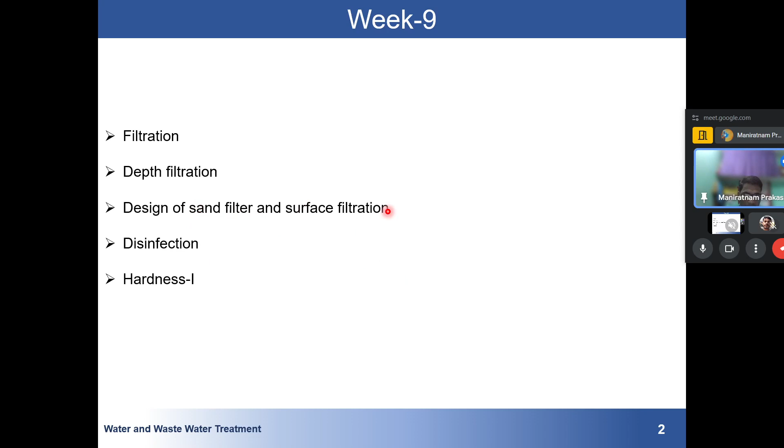Yes, we will be discussing the design of sand filter. As usual, every week we discuss important questions expected in your assignment or quiz, and some concepts at the end of lectures. If you have any doubt during the discussion, you can write in the chat box or raise your hand. If you think I am going too fast or too slow, you can stop me and ask me to repeat things. I will be happy to do that.

So I will be moving forward. The first question is related to depth filtration: which of the following are the mechanisms of depth filtration? There are 4 options given. Before discussing a particular question, I first discuss its fundamentals. So before discussing the term depth filtration, one should know what simple filtration is, and then what depth filtration is.

So with that, first I will discuss filtration. Everyone is aware of filtration. You can think of it as the last step of water treatment, whether it is wastewater treatment or drinking water treatment. Generally in wastewater treatment, filtration is rare and depends on the purpose of treating the wastewater. But if I have to dispose of my wastewater, filtration generally does not happen. For drinking water, if you have collected water from a river or groundwater and treated it, before passing it to the community, you must make sure that water is filtered. So filtration is everything. Everyone knows the definition of filtration: to reduce the turbidity of the water.

Whatever is written there, they are using a conventional method - if a medium is there that contains some kind of sand and similar material, then that water passing through will be termed depth filtration. The particles penetrate deeper in the filter medium where they are trapped throughout the material's depth. Mechanisms of capture include interception, sieving, sedimentation, diffusion, and adsorption within the filter media. Remember, this was influenced by pore size, flow rate, and pressure. But in this case...

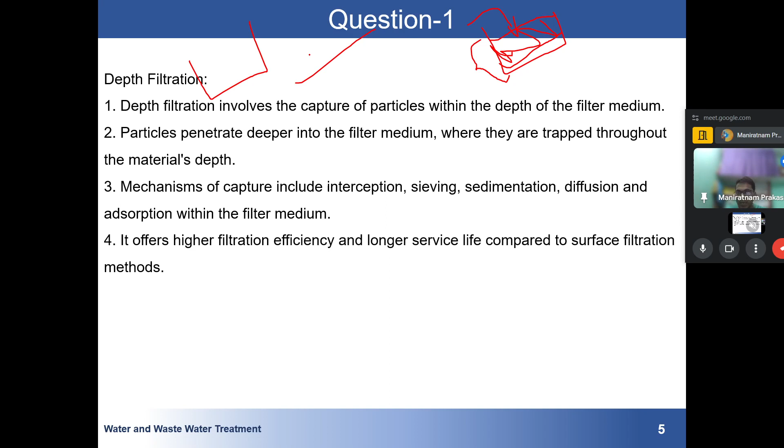What is happening is they are talking about these four mechanisms. It offers higher filtration efficiency and longer service compared to surface filtration. You can imagine, for filtering some x amount of water, if you are using just a membrane versus a filter system, obviously the filter system will be more efficient and long-lasting.

So in summary, both filtration and depth filtration involve the separation of particles from fluid. Depth filtration operates by trapping particles within the depth of the filter medium, whereas filtration typically captures particles on the surface of the medium. I hope this is clear.

So I will be discussing more about the mechanisms of capture involved - I have written only three because these are the main mechanisms: interception, sieving, and adsorption. But apart from that, sedimentation, diffusion, and adsorption are also prevalent methods in filtration.

So in interception, what happens? Particles are captured as they come in contact with the filter media fibers or pores. When particles move through the filter medium, they may collide and become trapped by the fibers and pores. This mechanism is particularly effective for particles larger than the pore size of the medium.

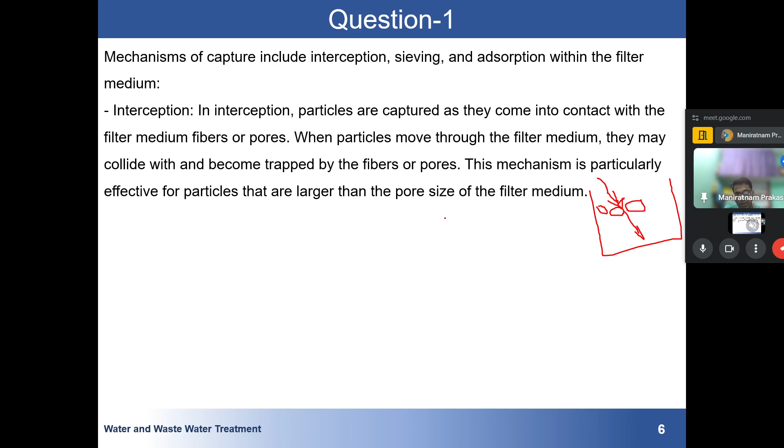So generally, this is your filter media - your grains, whatever the media is, will be arranged in this manner, leaving some kind of pores. Water containing suspended solids will come here, and if the particle size is larger, it will get trapped here, while filtered water gets down here. So when particles move through the filter medium, they may collide and become trapped by the fibers or pores - this only happens when the particle size is larger than the pore size of the filter media. I hope this is clear to you.

Next is something called sieving. Sieving occurs when particles are retained by the small pores within the filter media. As fluid passes through, particles larger than the pore size become trapped within the pores, while smaller particles can pass through more easily. This mechanism is based on the size exclusion principle and is effective for a wide range of particle sizes - again, they are talking about pore size only.

Coming to adsorption - it involves the adhesion of particles to the surface of filtration media due to attractive forces such as electrostatic force. I hope everyone is aware of this term adsorption, so I won't be discussing it in depth. It's a simple interaction between contaminants, generally solids present in the water, and the media, generally solid media only.

Adsorption involves the adhesion of particles to the surface of the filter due to attractive forces such as electrostatic force, van der Waals force, or chemical interaction. Particles may adhere to the surface of the filter media as they pass through it, leading to their removal.

Suppose this is your media and this is your particle size. What will happen is that it will have some adsorption capacity, so water containing suspended solid will come here and the particle present here will get attached to this solid. In this way the water coming from here will be free from any kind of suspended solid. Remember, it's not like only this mechanism is happening.

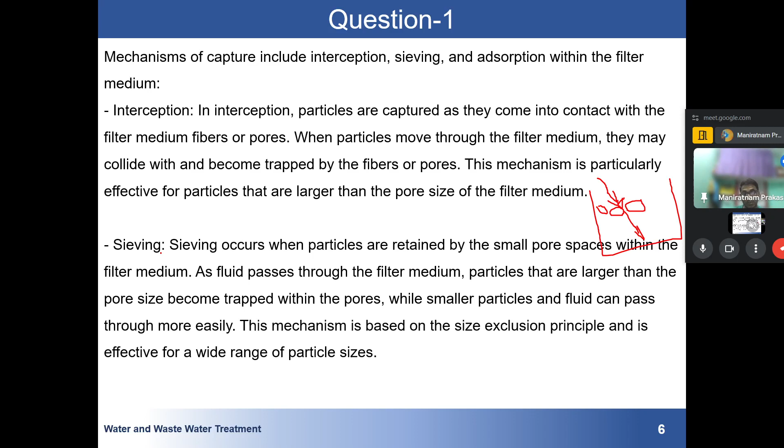All mechanisms are happening together at some place, depending upon what kind of pore size, what kind of media is present in the system, and what kind of suspended solids are present in the system. So the last option is sedimentation.

In some cases, particles may settle out of suspension and accumulate on the surface of the filter media, enhancing the filtration process. This is sedimentation, which all of you already know.

So in this pore size, suppose this is the pore size, let me draw the diagram. This is a pore size, and this is all the soil media. Water will accumulate here, and there are high chances that a smaller particle will get settled down at this place. This is what we call sedimentation.

In some cases particles may settle out of suspension and accumulate on the surface of the filter media, enhancing the filtration process. This sedimentation can help reduce the load on the filter media by removing larger particles before they reach the medium, thus prolonging its lifespan. I hope this is clear to you.

So again, this is another case, that is diffusion. Diffusion means, if you joined our first class, diffusion happens when there is a difference in concentration. Diffusion always happens from high concentration to low concentration.

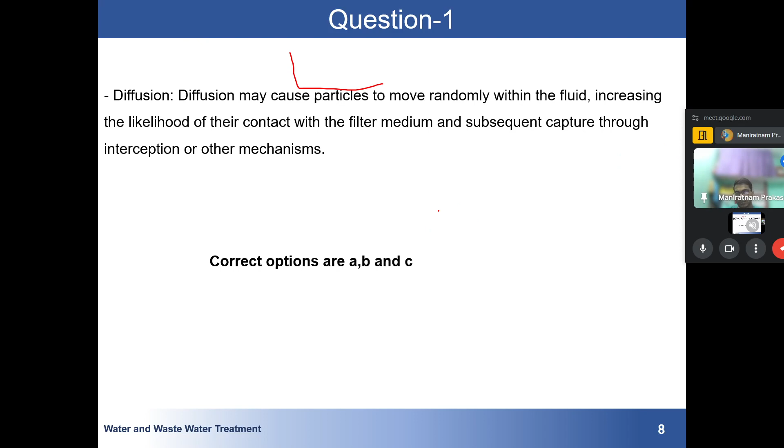So the correct options are A, B, C. Let me go through the question again. The question was: which of the following are the mechanisms of depth filtration? Again we have seen that interception is one process, sedimentation is also one process, and diffusion is also another process.

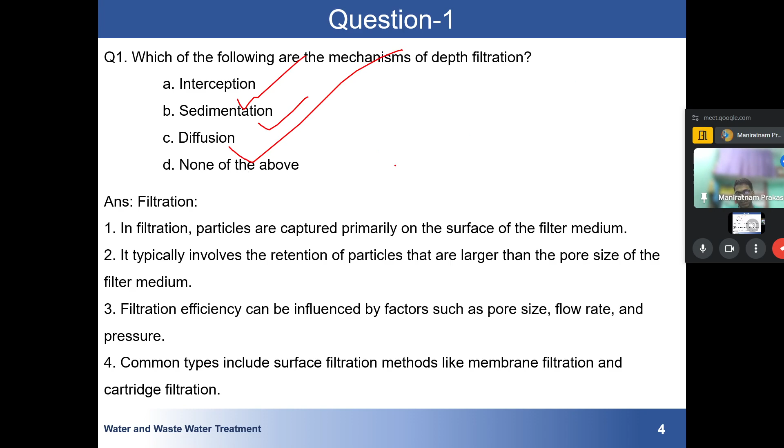So that was question number one. As no one has joined, I'll be moving forward.

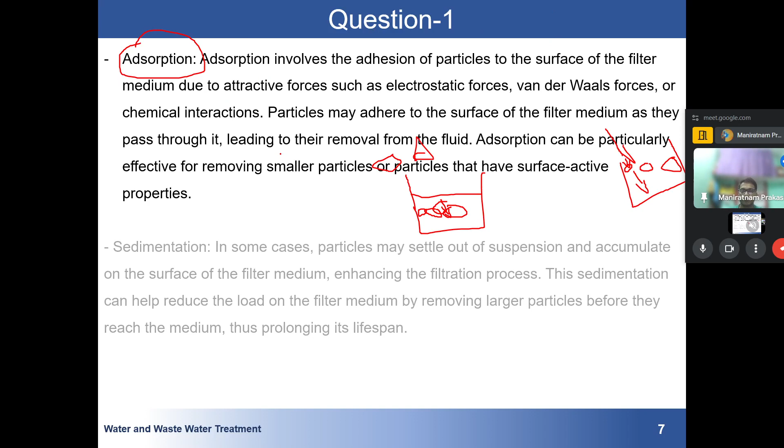Which of the following statements is true, or are true, for granular media filtration? Granular media filtration is a process used for water treatment. Granular means simple sand, which we use in our construction and other such things.

It doesn't matter if I pause because it is being recorded. Still, it will record.

Granular media filtration is a process used for water treatment where water passes through a bed of granular materials such as sand, anthracite, and activated carbon to remove suspended solids and impurities. Generally, whether it is rapid or slow sand filtration, we use this kind of material. There are some advanced materials where they use activated carbon, but that is costly. For a cost-effective method, we generally use gravel, sand, etc.

As the water flows through the filter media, particles are trapped within the void spaces between the grains of media. As the filter operates over time, the trapped particles accumulate within the filter media. This accumulation leads to a phenomenon known as head loss, which is a pressure drop experienced by water as it passes through the filter. Essentially, the more particles accumulate in the filter bed, the more the flow path for water is restrained, resulting in an increase in head loss.

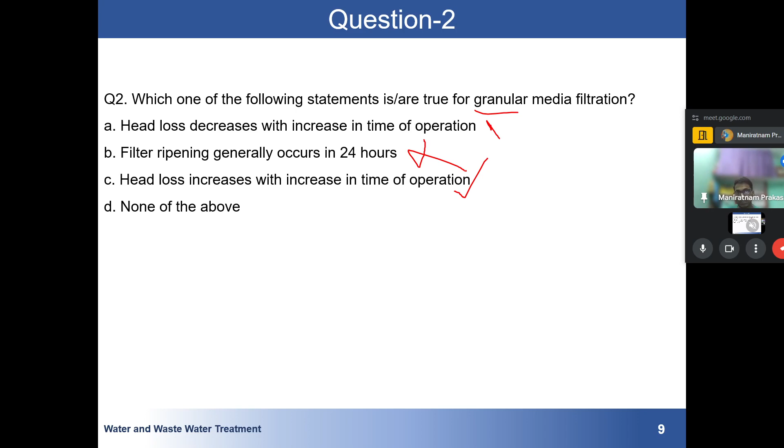Consider the following statements related to the backwashing of the rapid gravity filter. Statement one: backwash velocity must be lower than the settling velocity of the smallest media particle. Statement two: the total volume of the media bed as well as the total volume increases during backwash.

You can mark this second statement as incorrect without knowing much about the filter, because suppose you have prepared something with some volume, now what happens is you are backwashing. I'm assuming you are aware of backwashing. In short, when there is a breakdown of the filter, head loss is more than 3 meters generally. With time this head loss will increase.

So if the head loss is 3 meters, we pass some water, and what happens is the suspended particles get removed and taken out, so that our media is again free from any trapped particles from the contaminated water. This is called backwashing. Now suppose you have used x meter cube of water and x meter cube of sand in your filtration medium, this backwashing will neither decrease nor increase your sand. The volume will be constant. So this is a false statement.

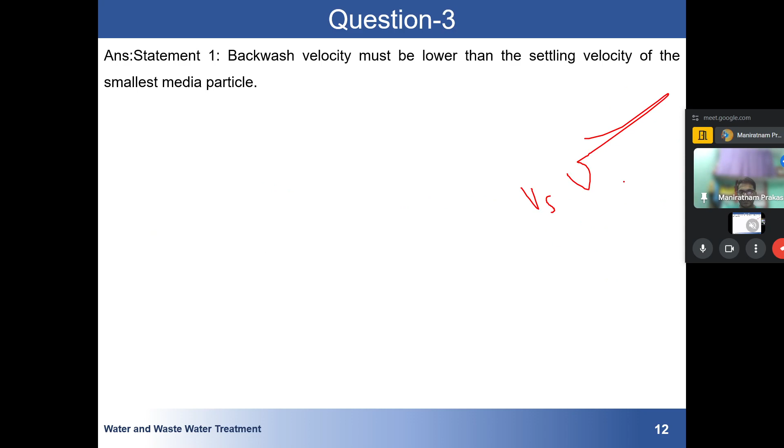So what is happening when you are supplying some water for backwashing? Obviously, the velocity should be much lower. We pass water at some flow rate, and the area of the sand filter is fixed. So you must supply your backwash flow at some constant rate, and that rate divided by the area will give velocity.

Now, we know that there is one smaller particle which has some settling velocity. So imagine if you are applying backwash with very high velocity, there are chances the smallest particle will get carried away from the rapid sand filter, and it might cause loss to your filtration media, and we don't want that.

So how do we make sure that during backwash all the particles in the filtration media remain in the filter media? For that, we make sure that for the smallest particle, whatever settling velocity is there, my backwash velocity should be lower than that velocity. So this statement is true.

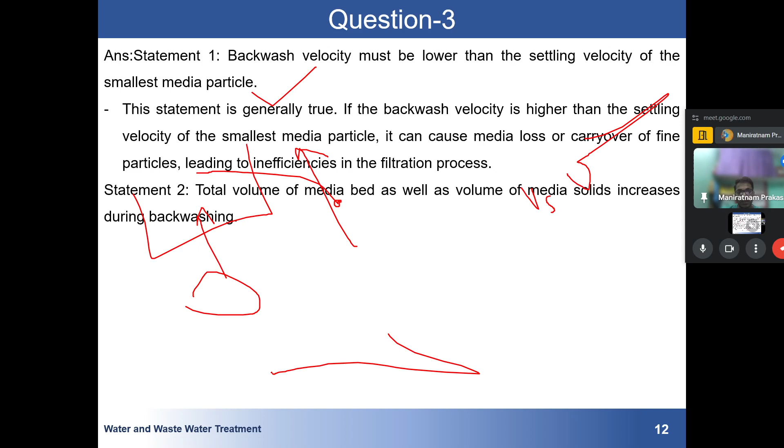So the correct option is A, that statement 1 is correct and statement 2 is wrong. I hope this is clear to you. So the answer of this question was A.

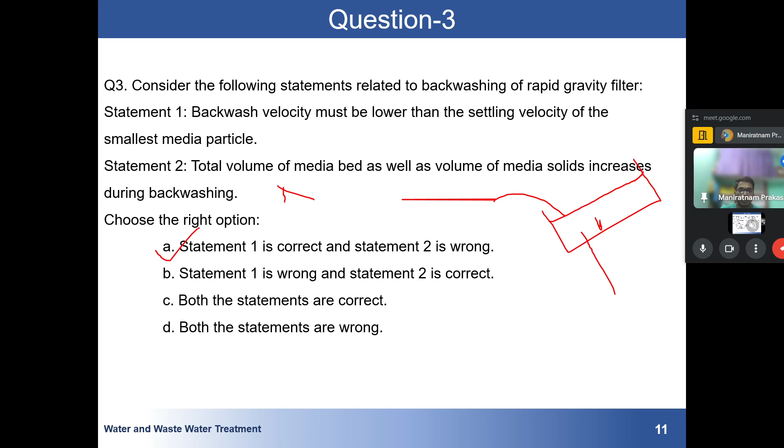If you have... oh sorry. Which of the following is not correct? I have difficulty in pronunciation of this term, so I will just call it layer.

Layer is not formed in slow sand filter. Before knowing what this layer is, you should know how a slow sand filter works. If you have gone through the lecture, you must have covered in detail how slow sand filters work. This layer increases the quality of filtration. This layer takes around 1 hour to get formed after being scraped while cleaning the filter. How do we clean our filter? Through backwash only, and this layer is formed by the process of biological metabolism by microorganisms.

So you have to mark the not correct statement. This is a kind of biological layer which forms above the sand filter in a slow sand filter. This is a general picture of a slow sand filter. It contains sand, gravel, and at the bottom of this media there is a collection system.

As in the first slide I was saying, for filtration what is our main target? Our main target is to reduce the turbidity of the water. Actually, if you look at the definition of filtration on the internet, you will generally see that it is to remove colloidal particles, suspended particles, and so on. So how will you make sure that after filtration all suspended and colloidal particles have been removed? To measure that, a characteristic or parameter that is checked for the water is turbidity.

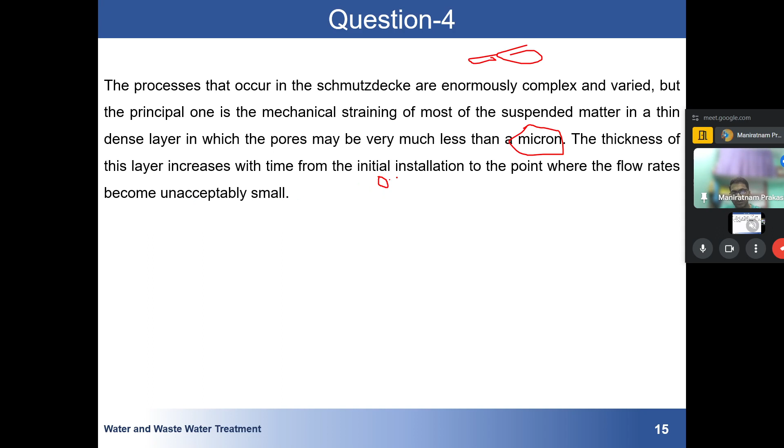The thickness of this layer increases with time from the initial installation to the point where the flow rates become unacceptably small. So what happens is that in this slow sand filter, the flow is already very small, that is 0.1 meter per hour.

Now remember that when we are analyzing our system, we make sure that the flow rate of water being collected has a uniform flow rate. This flow rate must have some limit that it should not go below. So if during collection of water you see that this flow rate is much less than 0.1 meter cube per meter square per hour, it means that layer has grown too thick, so you have to remove it.

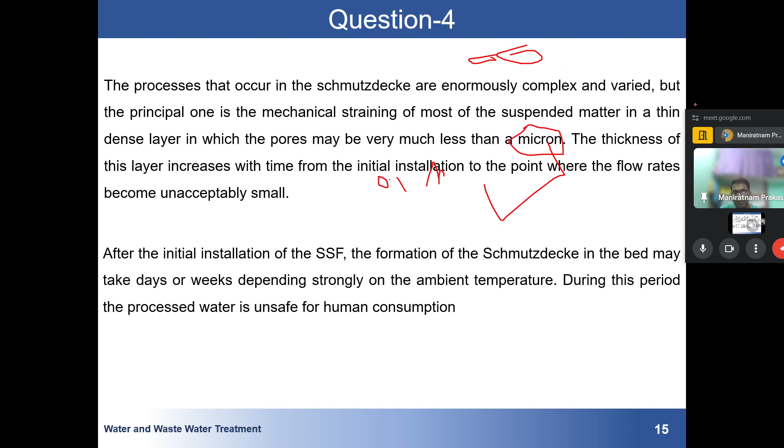After the initial installation, the formation of this slime layer in the bed may take days or weeks, depending strongly on the ambient temperature.

Remember, it takes days or weeks to form depending upon the temperature of the system. During this period, the processed water is unsafe for human consumption, since whatever is coming out from the filtration during this formation is unsafe. That's why slow sand filtration takes too much time to filter a small quantity of water.

That's why slow sand filtration is generally not used at higher scale. For smaller scale, this is used, but for larger scale, this is not used.

When the filtration rate drops unacceptably, say after 6 months, the SSF must be cleaned carefully, removing 25 mm of the top layer, which includes most of the existing layer, after dropping the water level to slightly below the latter.

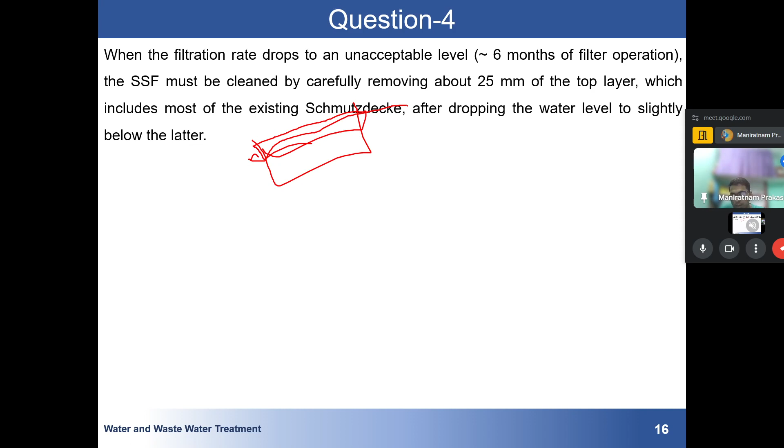Imagine that this much thick layer has formed, so we won't be removing the complete slime layer, we will only remove up to some part, because if we remove this layer completely, it will again take months to form, and this is the main mechanism involved in slow sand filter. Removing all of this slime layer will just create a problem for the sand filter, so instead of removing it completely, we just remove some part - carefully removing about 25 mm, that is 2.5 centimeter, of the top layer.

In time, the depth of the original bed of sand will reduce by the cleaning process to about 0.75 meter, and when the original depth must be restored, as new sand will be added.

Now remember that this layer is not formed separately, it is a part of the sand only, so during removal we will be removing that sand along with it. In time, the depth of the original bed of sand will have reduced by the cleaning process to about 0.75 meter, that is 30 inches, when the original depth must be restored as new sand.

Simply placing new sand on top of the existing sand will require an excessively long time to develop a new layer. To accelerate this process, the layer is first removed and discarded, and then most of the existing bed is removed and set aside for reuse.

This new sand is placed in position and then covered with the original bed. In this way, biological activity and the new layer are more rapidly restored. I hope this is very clear to you, how this process works.

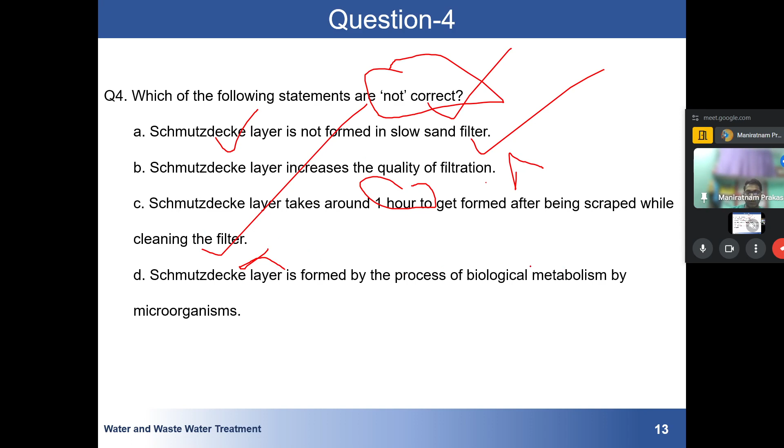Lastly, this is formed by the process of biological metabolism - yes, this is correct, but this is not my answer. I hope this is clear to you.

Coming to the numerical question, calculate the percentage of recovery of reverse osmosis. Remember, reverse osmosis is an advanced kind of filtration using membranes. Slow sand filtration and rapid sand filtration are conventional methods, but currently people are using reverse osmosis. In your house also you are using filters, and you can check which mechanism they are using.

They are saying calculate the percentage recovery given the feed water flow rate, retentate flow rate, TDS in the feed water, and TDS in the permeate. Remember, feed water means whatever water you are adding to the filter, coming at some flow rate, that is known as feed water flow rate. The permeate means whatever water we get after filtration. In reverse osmosis, one part will contain fresh, filtered water, and the other contains unfiltered water.

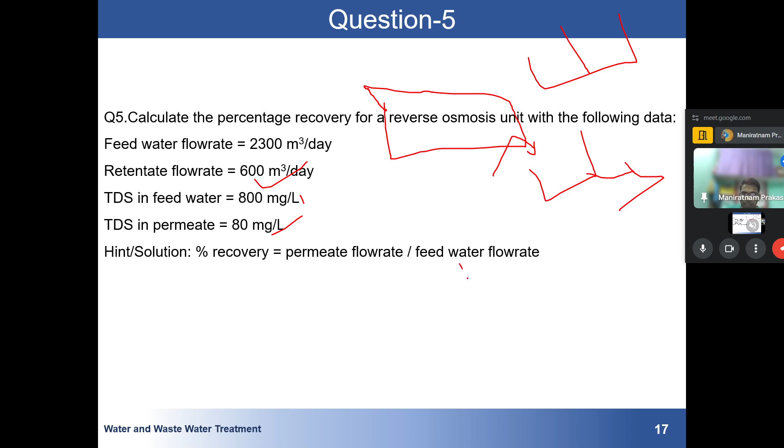They have given a hint that percentage recovery equals permeate flow rate divided by feed water flow rate. They have not directly given the permeate flow rate and feed water flow rate, but the retentate flow rate is also given in the question, so I will calculate the permeate water flow rate.

The permeate flow rate is obtained from the retentate flow rate - whatever water is retained, I subtract that from the feed flow rate to get the permeate flow rate. So permeate flow rate comes out to be 1700 meter cube per day, and we know the feed rate is 2300, so the percentage recovery is 73.91%.

These two data were just to get you confused, but we only need the data of these two things. So the percentage recovery is 73.91%. The percentage recovery of the reverse osmosis unit is approximately 73.91 percent.

Coming to the numerical question related to filtration only - till now we have discussed 5 questions, all related to filtration. Coming to the sixth question: a sand filter provides water treatment to a population of 1.2 lakh. Average water demand is 140 liter per capita per day, meaning one person in a day requires around 140 liters.

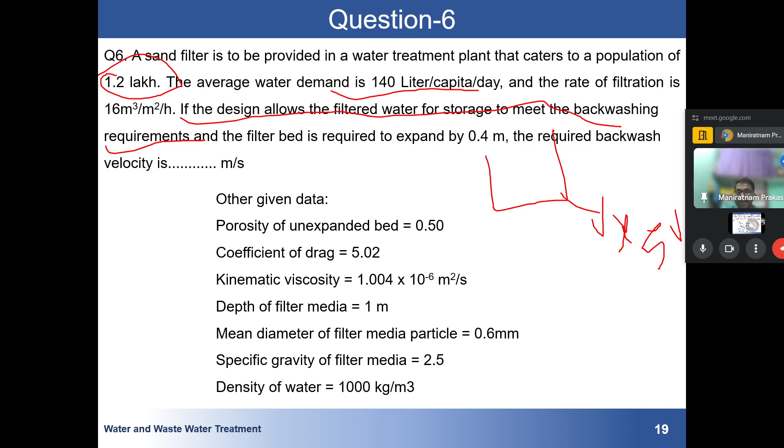The filter bed is required to expand 0.4 meter, and we need the required backwash velocity from the given data. Remember, this was your sand - when the water goes through, there will be a rise in height of this sand bed, expanding by 0.4 meter. So you have to calculate this backflow. Remember, there are generally two or three things to consider.

This velocity should be less than your smallest particle size settling velocity, and it should be a function of this expansion. There has been some empirical formula given, so we will be directly using that formula for calculation of this backwashing. So what are the given data?

Porosity of the unexpanded bed, remember, porosity of unexpanded bed, then coefficient of drag, then kinematic viscosity. From this data you can have an idea that they are asking you to calculate the settling velocity. Filter media mean diameter is given, specific gravity is given, density is given, everything is given to you, so you just have to use these data.

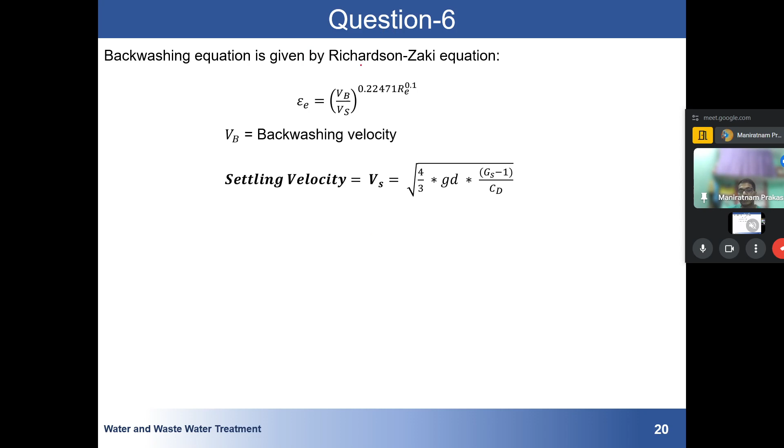So this backwashing is given by Richardson-Zaki equation, where they say that the porosity of this expanded bed, this small e, somewhere you must have seen it written as eta also, but here I am using this epsilon symbol because this is what is being used in your class notes. So the expansion is given by backwashing velocity divided by settling velocity to the power 0.22471 into Reynolds number to the power 0.1, Reynolds number of expanded bed. RE is just indication for Reynolds number. VB is backwashing velocity and Vs is settling velocity.

That is 4 by 3 into g, d into gs minus 1, divided by Cd.

By just checking whether this formula is correct, depending on the given data, I will be calculating this settling velocity Vs, that is under root of 4 by 3, 9.81 meter per second square, into 0.6, because this mean diameter is 0.6 mm, into 10 to the power minus 3, into gs they have given 2.5 minus 1, and Cd they have given 5.02. So from that Vs will be 0.048. You can check it, this meter and meter will combine to form meter square, these are all unitless quantities, and this second square will again form second, so 0.048 meter per second.

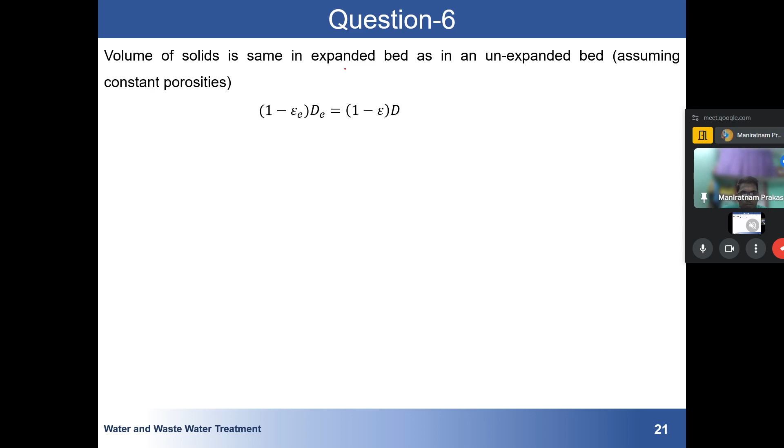The volume of the solid is same in expanded bed as well as unexpanded bed. As I have discussed earlier, the volume of the solid means volume of the sand medium is same for expanded bed and unexpanded bed. Depending upon this, if you do some math, you can go check the video lecture for the derivation. You will come to this equation: 1 minus expanded porosity, into depth of the expanded bed, is equal to 1 minus E, into 1 minus unexpanded porosity, into this depth of the bed.

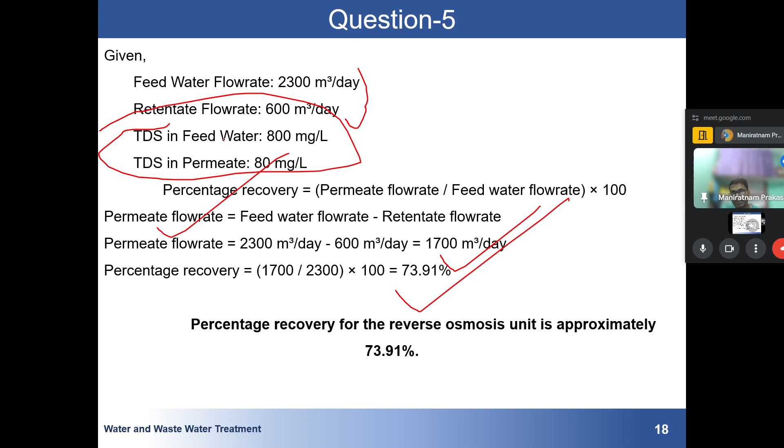During expansion, the porosity or the distance between the two particles will increase, creating a highly porous medium. That's why porosity has increased.

I will substitute all the values here, and after calculation I will get the backwashing velocity as 0.012 meter per second.

If we imagine that this is my smallest particle, they have just given a mean diameter of the particle, so there might be some particle with a dimension less than 0.6 mm. The settling velocity of that particle will be smaller than this one. If that's not the case, there are chances that the particle may get lost during backwashing.

This kind of calculation is done for the design of any filtration medium. I hope this is clear to you.

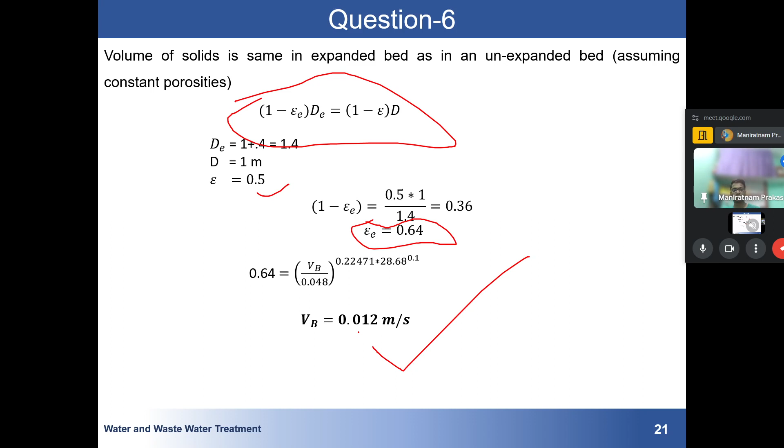Coming to the head loss in the filter before backwashing, based on the given data. There is some apparatus attached to the rapid sand filter that always measures the back pressure.

I'll just show you for your purpose—actually, you can always check your study material. There they have shown valve 1, 2, 3 to be closed or open. You can refer to any standard book also.

From there you can see that at the end of the filter media there is one pressure gauge that keeps measuring the head loss. Once that head loss has crossed 3 meters, there is a 100% guarantee that the water coming from the filter is not filtered, or it has very high turbidity, meaning the filter media requires backwashing.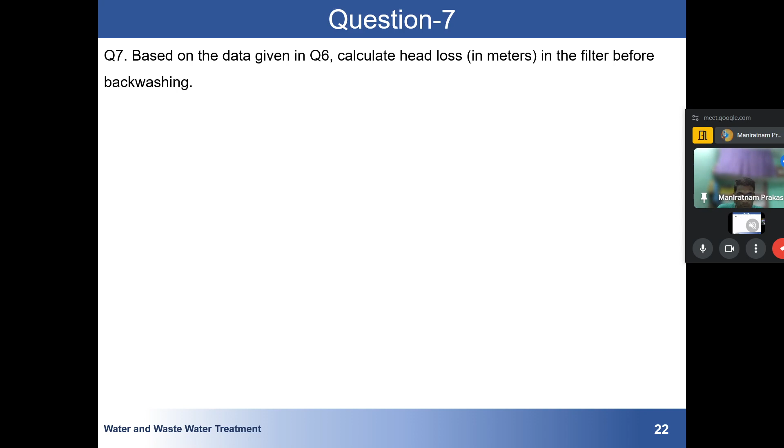Depending upon the density of the solid and other factors, the head loss is generally given by this equation. There is another formula I will discuss later at the end of the discussion, but the derivation of this is already given in your lecture.

If you put in this value, it gives 0.75 meter. So they have designed their filtration system in such a way that 0.75 m is the minimum for backwashing, but for a bigger plant it generally goes to 3 mm or 3 meters also.

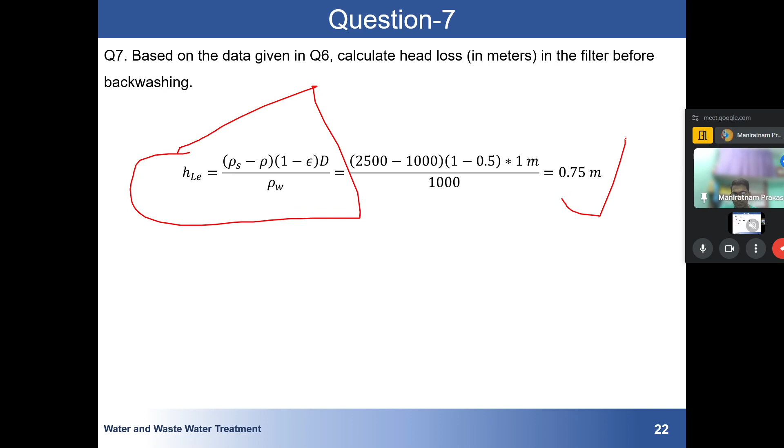I hope this is clear to you.

Coming to the next question.

Just one minute. Actually, in my area today is a holiday.

Sorry for the inconvenience. The question is: a water treatment plant in a town is proposed to be expanded.

With time, as population increases, water demand also increases. So they are planning to expand their water treatment plant, because the new design flow rate is 1 meter cube per second. A deep bed granular sand filter with a given design loading rate is to be used.

Based on some calculations, if the area of each filter box is limited to 50 meter square of surface area, how many filter boxes are required? Answer to the nearest integer.

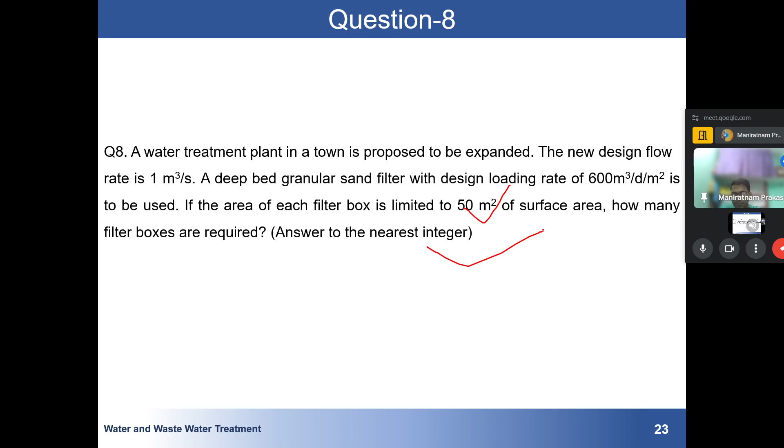This is a very simple question based on unit matching and such—anyone can do it. The design flow rate is given.

The design flow rate is 1 meter cube per second, meaning 86,400 meter cube per day. And the total surface area—

This is the flow rate and this is the loading rate. From the total volume and the design loading rate, we can find out the total surface area required for the filtration.

Remember, most questions related to this water treatment unit are just based on unit matching. If you don't know the theory, that is not a good thing.

If you are facing some problem, if you know the basic things, you can calculate the answer, or you can find the answer just by matching the unit. But you should know which unit should be matched. I'm not recommending this, but I'm saying this from the point of view of a competitive exam. But if you are appearing for any theoretical exam, you must write it in the proper way.

So this is the total volume, this is the design flow rate, design loading rate is 600 meter cube per day per meter square. This meter cube, this day will get cancelled out, and I will be getting 144 meter square. They already say the surface area of the filter box is 50 meter square, so it will give 2.888, and since they are asking to the nearest integer, it is equal to 3.

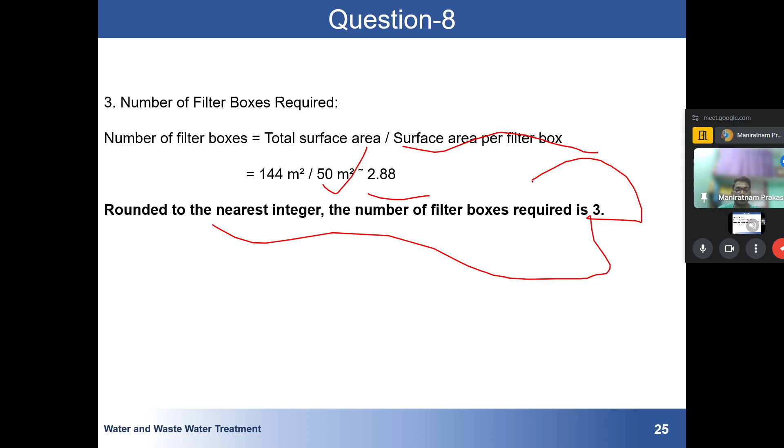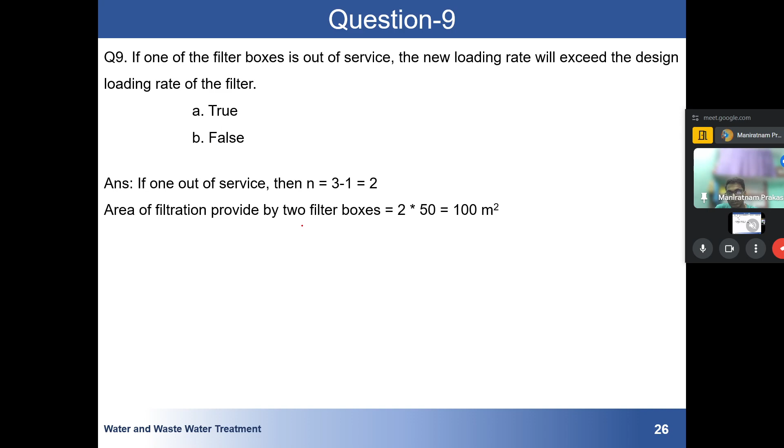So the last question of this day, after which I will discuss some theoretical part. If one of the filter boxes is out of service, the new loading rate will exceed the design loading rate — true or false? If one of the units is out of service, so it will be 2, and the area of the two filter boxes will be 100 meter square. We know the loading rate, and with this area, it becomes 864 meter cube per day per meter square, which is higher than the design loading rate of 600.

So obviously our design loading rate is only 600, meaning whatever unit was there, it was only designed for a loading rate of 600 — the unit being meter cube per day per meter square. So this is increasing the design loading rate, and obviously it will cause a problem. So this statement is true, and from the point of view of design, this is not okay. So till now I have covered all the theory part.

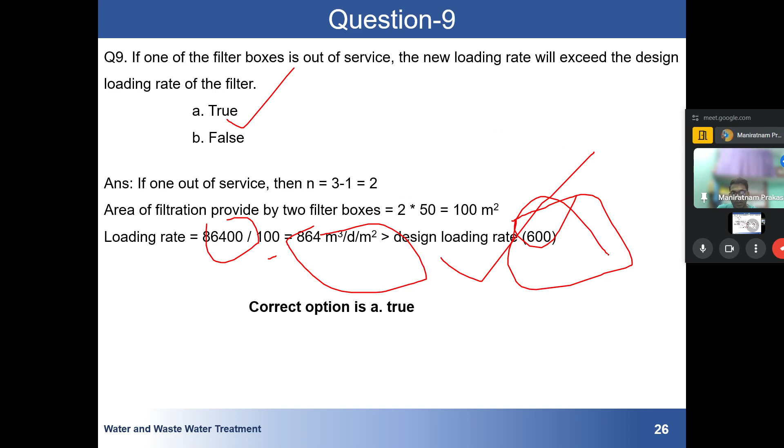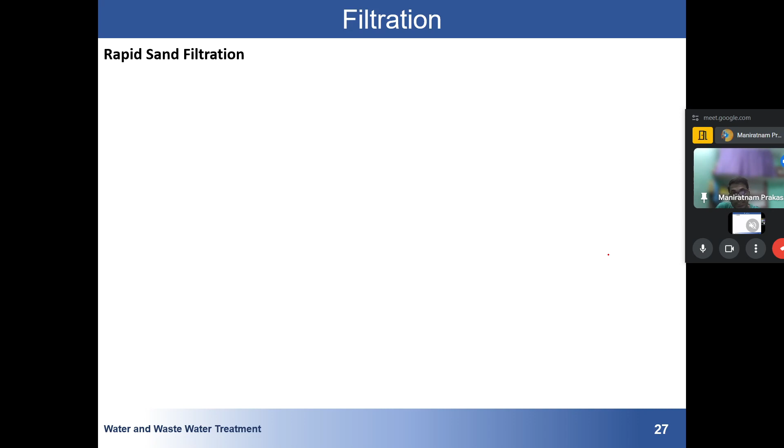So what I will be doing now is discussing some concepts related to rapid sand filtration. This rapid and slow filter only differ by one thing, that is flow rate. In slow sand filter, the flow is slow, but in rapid sand filter, the flow rate is very high. We will see here.

So water containing turbidity around 5 to 10 is applied to the sand bed. Almost all particles in the effluent are retained in the sand bed such that the effluent water has very low turbidity. My target was to remove water having high turbidity. This is the main concept of filtration. Whatever the definition, if you refer to 10 books, you will get 10 kinds of definitions, but the overall gist of all those books is that you have to reduce turbidity.

So this will be your media — it will contain a layer of sand, with water containing about this much turbidity. Remember, in the case of slow sand filter, we were applying 30 NTU, because we know it will require a very high time, so the mechanism is such that it can remove turbidity from 30 down to 1 NTU.

But what is happening in rapid sand filtration? The retention time is very less. How much retention time is there? Let me see — retention time is around 2 to 3 days, sometimes even less for some cases. But for the slow sand filter, you can see it was in months. So what is happening is that's why the retention time is less.

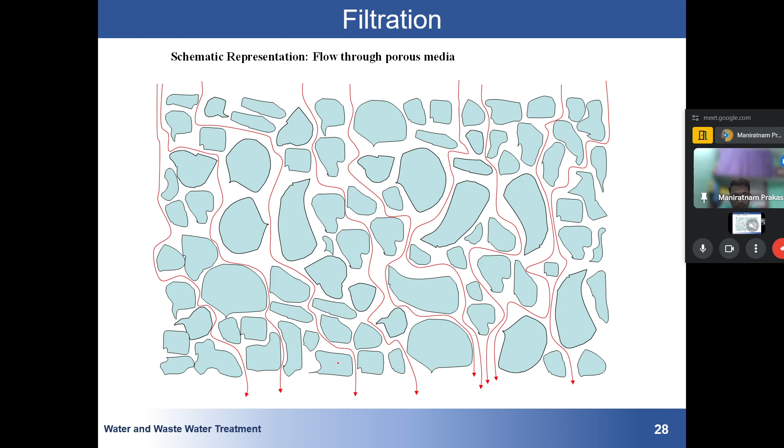And we will be going through this. This just represents the flow of the water, it does not contain any kind of particles. So now, obviously this water which is coming will contain some colloidal particles or suspended particles.

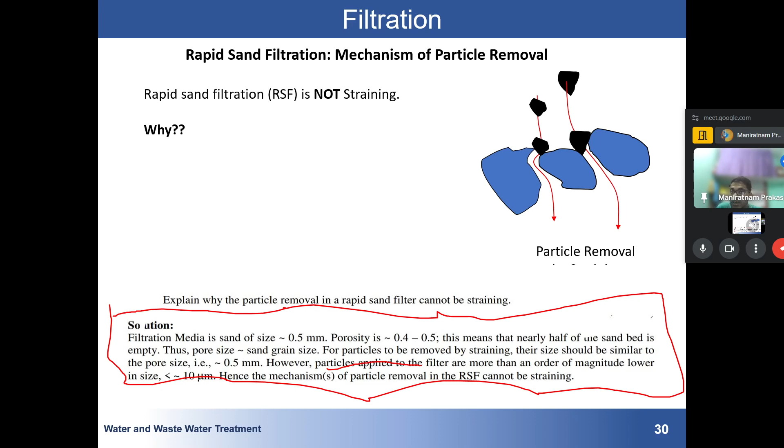We are applying different kinds of water in slow sand filter versus rapid sand filter. Head loss can be measured directly by seeing the instrument, or it also depends on some empirical formula that has been developed, such as the Carman-Kozeny equation. This is given by this equation.

I think one should remember this equation because in 2021 this question was frequently asked in the GATE examination. The person who prepares the GATE questions expects you to know this formula. Sometimes, I don't know, in 2021 it was not explicitly written, but they still asked this question about the Carman-Kozeny equation.

So this I have already covered. You can see that many books generally say that the sand used in slow sand filters is of very small size, while in rapid sand filters it is of large size. There is no such thing - generally the sand used in both is of the same size. Here, sand size is around 0.5 mm.

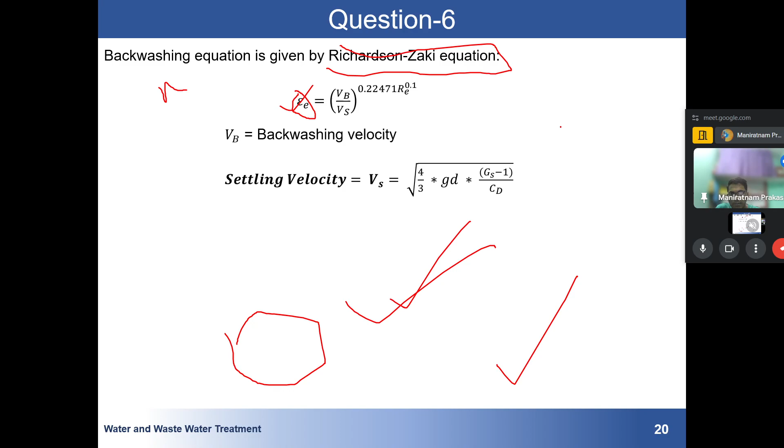Let me check what kind of sand was used in the slow sand filter. Oh, sorry, I said something wrong - in slow sand filter it is generally smaller particles. Sorry, let me take my words back. The porosity is almost the same for both cases, but the sand size is much smaller in slow sand filter. Sorry, I must have misread something.

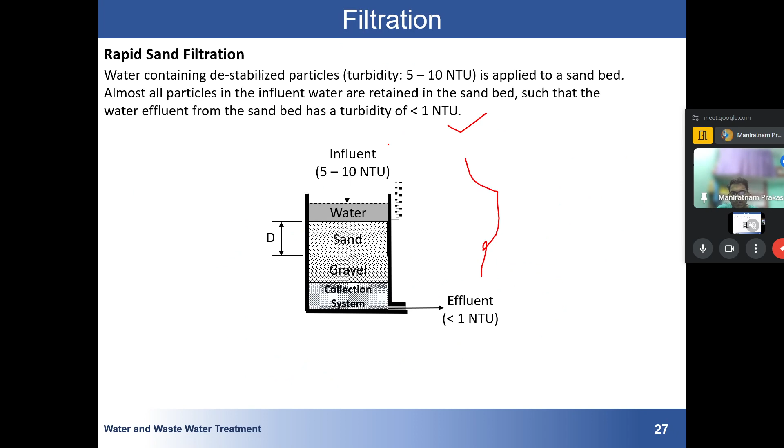Let me clear this up. For this depth of filter, the particle size is 0.5 mm, which is much larger than in slow sand filtration. The gravel, again, is the same as compared to that system, for the slow sand filter.

The filtration rate is, here, see the filtration rate is 8 to 12 meter cube per meter square per hour, meaning 12 meter cube of water per area is being filtered out. So you can imagine how much water is being filtered in 1 hour depending on the surface area. You can see the box filter, remember it was around 50 meter square, so depending on that you can imagine how much water is filtered in 1 hour.

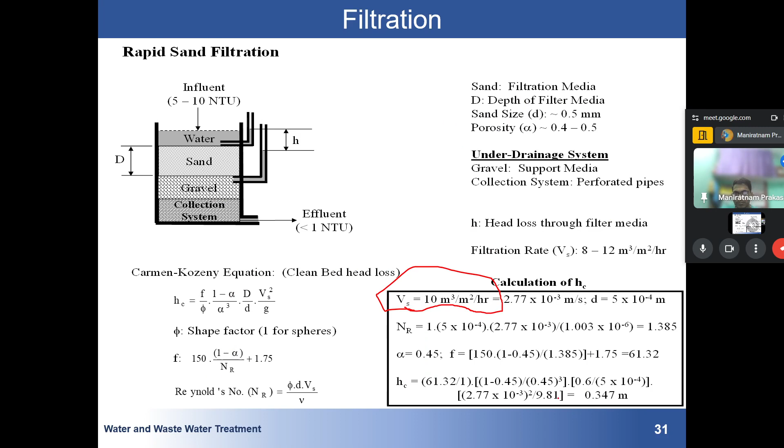So again, I was saying about these two or three things, that is filter ripening and particle breakthrough.

As soon as I add some water, it does not happen that our water will be coming out filtered immediately. Initially the filter system takes some time to adjust to the condition of the water which I am adding. That is known as filter ripening. After some time, due to accumulation of more and more particles in the filter, there will be a particle breakdown, and our filter will finally break down. This is considered a particle breakthrough.

There is a question that the evolution of effluent turbidity during a filter run is shown. Initially you have added water of 5 to 10 NTU. When collected, initially it should be less than 1, but it is not - it is greater than 1, but after some time the turbidity is less than 1. After several hours, after several days, whatever the original water you were adding was coming out.

So you have to explain why the filter has turbidity greater than 1 NTU - why the effluent turbidity is slightly elevated at the start of the filter run, and then falls below 1 NTU. The second thing is to explain how toward the end of the filter run particle breakthrough occurs and turbidity increases to greater than 1 NTU. So the first concept is related to filter ripening, and the second concept is related to filter breakthrough.

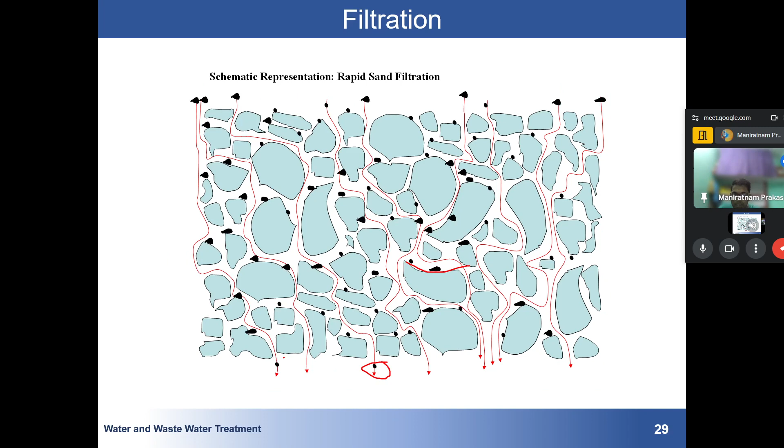However, some particles do manage to evade. If you have gone through this picture, you can see that some particles have gone through this filter media.

At the start of the filter, the number of particles escaping is relatively large, hence the effluent turbidity from the water is more than 1 NTU. That's why the water sample collected at the bottom of the tank obviously contains those particles also - that's why the turbidity is high.

However, the particles collected by the filter during the initial period act as secondary collectors, increasing the total number of collectors in the filter bed. Hence, after some time, the particle retaining capacity of the filter increases and the effluent turbidity from the filter falls below 1 NTU. This phenomenon is known as filter ripening.

So I hope you understand what is happening there. Initially all pores were very clear, nothing was getting trapped, but after some time it was just getting started - the filter was adjusting itself to the water being added in the system. Initially some particles were coming out directly in the water, but after some time it was getting trapped. That's why initially turbidity was high, but after some time it was smooth.

Particle breakthrough - due to reduction in the porosity of the filter bed during the filter run, the pore velocity in the filter media increases.

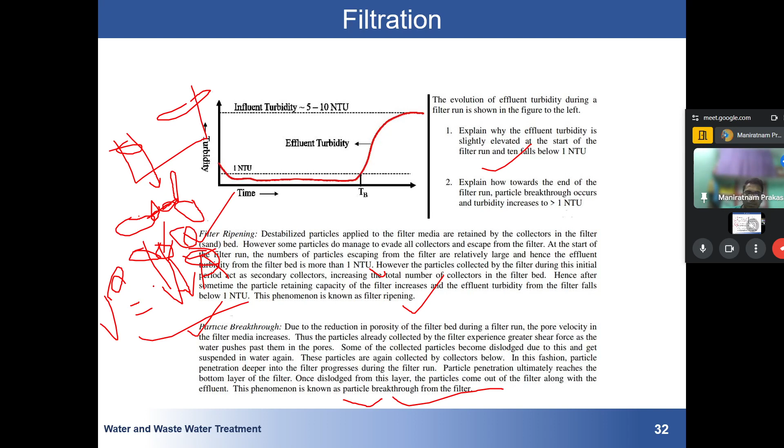I hope this is clear to you. This is very straightforward, nothing too scientific involved in this, but these are some of the general concepts which you should know.

At last, before moving to what alkalinity is, some of the things left, most important, is backwashing. A filter has to be stopped every few hours due to excessive head loss. After stopping, the filter is drained. Then the filtered water stored in the backwash tank is passed to the filter in an upflow mode.

Upflow mode means generally what was happening: water was coming here, and this was your sand media, it was getting filtered. But in backwash, water will come from here and this will expand, and this is known as backwashing.

The backwash rate is generally 1 meter cube per meter square per minute. Backwash time is not more than 5 minutes, though it can be more depending on the situation or type of filter. The backwash rate is such that the sand particles are fluidized during backwashing, meaning they do not completely get removed from the system. To make sure no single particle gets removed from the filter, the backwash flow rate should be less than the settling velocity of the smallest particles.

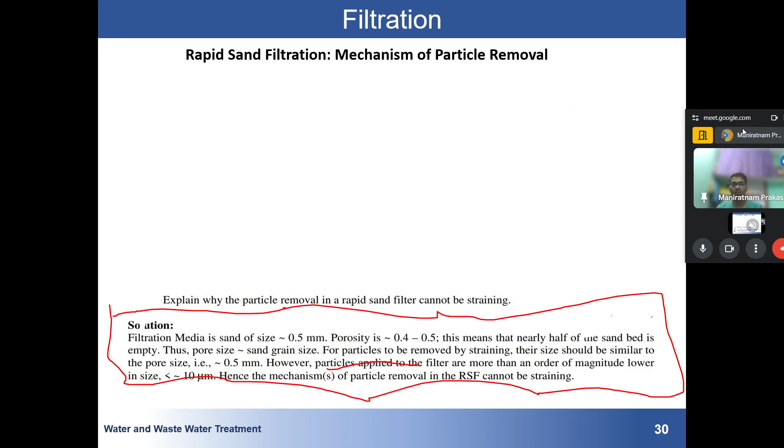I hope this is all clear. I hope this is clear. This is clear to you regarding this.

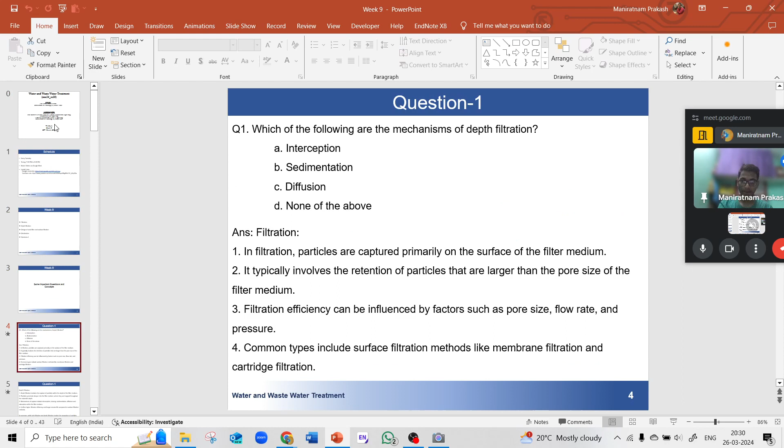What do you call that? Filtration. Okay, so these three topics are covered.

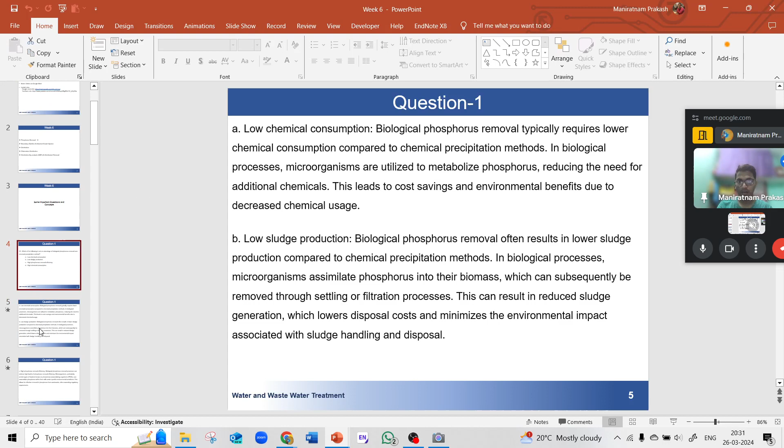I'm not going to discuss disinfection here. Let me check which session covered this. I think it was in Week 6. You can go to Week 6 and watch the disinfection discussion there, but I'm not discussing it here.

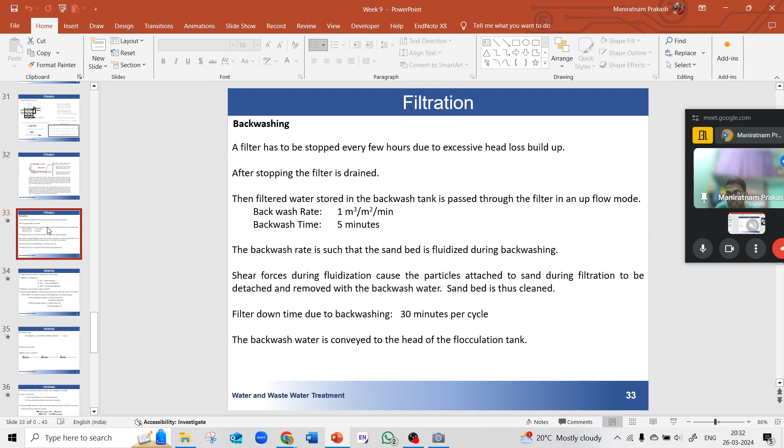About hardness: some portion has been discussed here, and some portion will be discussed in Week 9, which contains numerical questions related to carbonate and other things I'll be covering next week. For now, I am discussing two concepts: alkalinity and hardness.

Before understanding hardness, one should have an idea of alkalinity also, because both are related. Whenever questions are framed in an exam or anywhere, they are always framed in such a way that they will ask you to find the hardness.

They will always ask you to solve an alkalinity question and then a hardness question.

This is a kind of recap, since many of you present here already have an idea of alkalinity. So I will give some alkalinity questions, then one question related to alkalinity and hardness, and that will be the end of the lecture.

So how do we define alkalinity? Alkalinity is the ability of certain species to neutralize H+ ions in the water.

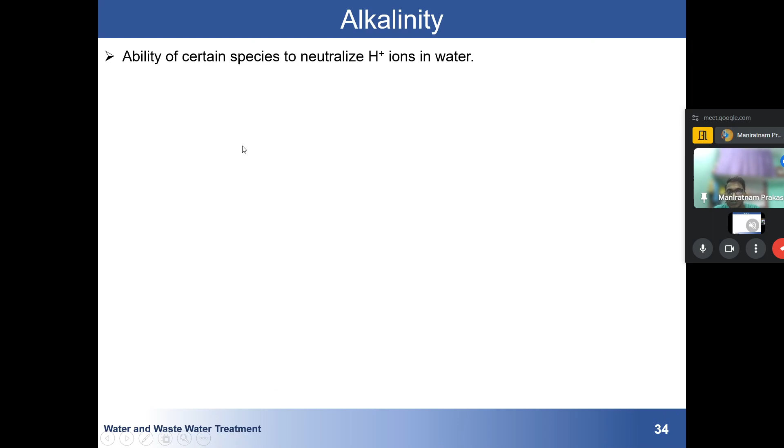This is generally due to OH-, that is caustic alkalinity, carbonate alkalinity, and bicarbonate alkalinity.

Generally wastewater does not contain phosphate, but sometimes it does. If it contains phosphate, then all forms of phosphate—PO4 3-, HPO4 2-, and H2PO4 minus—also cause alkalinity.

Because all these things also have the capacity to neutralize H+, they can cause alkalinity in the system.

Alkalinity is generally presented in milligrams per liter as CaCO3. There are two methods: experimental and theoretical. Experimentally, alkalinity is determined by titrating the sample with either 0.01 normal HCl or 0.02 normal H2SO4.

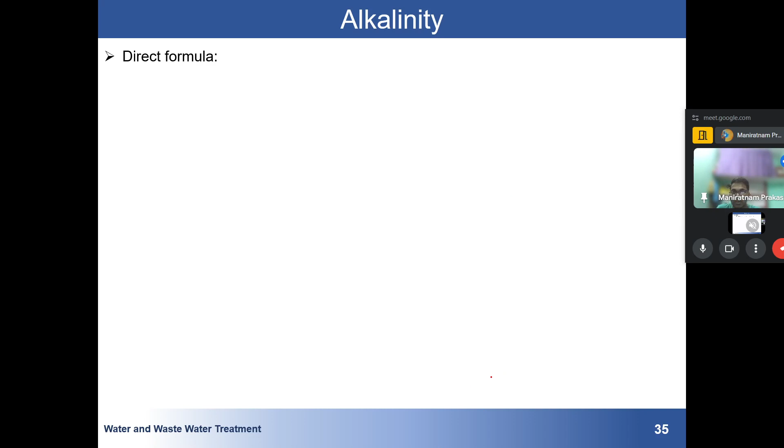I haven't written the formula here, so here's what happens: you take a sample and add phenolphthalein indicator first. It will either turn pink or remain colorless depending on the pH of the system.

Now imagine it has turned pink. You will start titrating with the help of HCl—generally HCl is used. After some time, it will turn colorless.

As soon as it turns colorless, you note down how much volume has been consumed. Say x mL of HCl has been consumed going from pink to colorless. That point is known as the phenolphthalein endpoint or phenolphthalein alkalinity.

Now you add the methyl orange indicator. Since the pH is still above 4.5, it will turn yellow.

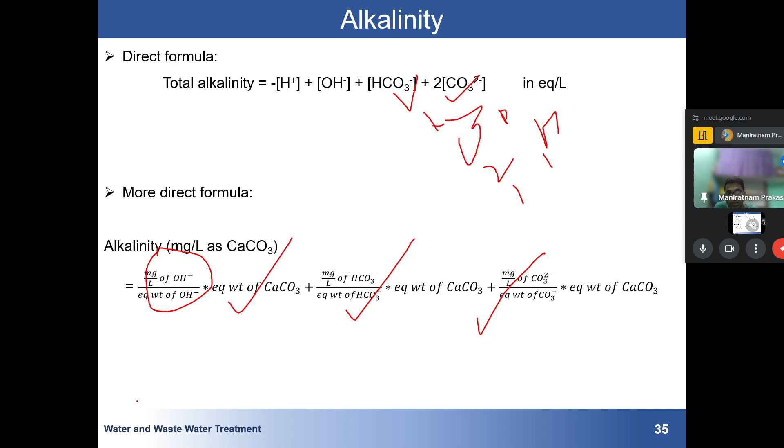CO3, similarly for bicarbonate, and similarly for carbonate, and you will be reporting your answer. Similarly, if phosphate and other ions are there, you can write here and you can report your answer.

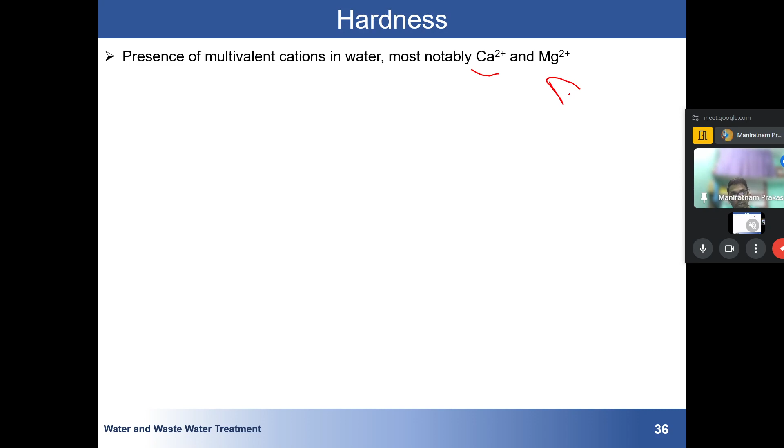Another thing is hardness. Hardness is the presence of multivalent cations present in the system, most notably calcium and magnesium. But remember, it can be due to aluminum 3 also. Just remember, whatever multivalent cation is there, it will cause hardness.

Calcium, magnesium, aluminum, iron 2 plus, iron 3 plus, and so on. If it is present, it can also be strontium. Generally these are present in the system, so they cause hardness.

Type of hardness: carbonate hardness or temporary hardness, and non-carbonate hardness or permanent hardness. A question might arise that we are talking about multivalent cations, but we are defining it in the form of carbonate and non-carbonate. So it is defined in this sense: if this multivalent cation is attached to carbonate, meaning if that cation present in the system is coming from somewhere.

So if it is coming from carbonate, then it will be known as carbonate hardness. So you will say that this calcium is giving carbonate hardness because it is coming from calcium carbonate. But suppose the iron present in the system is not coming from or attached to carbonate, then that is known as non-carbonate hardness.

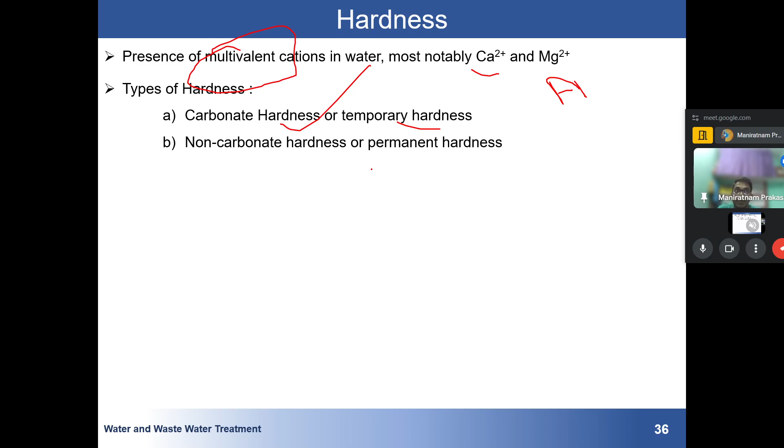So this is known as temporary hardness, because it can be easily removed just by boiling and such. But non-carbonate hardness is permanent hardness, which cannot be removed by simply boiling. You need some advanced mechanism to remove it, such as ion exchange and so on.

Experimentally, how is hardness determined? It is determined by titrating the sample with EDTA in presence of EBT indicator. Initially, the EBT present in the system will form a complex with multivalent cations present in the system, and it will form a red color.

Initially, whatever your sample is, it will be colorless, and EBT itself has a blue color. So as soon as you add EBT, it will turn red, because of the presence of calcium and magnesium or other multivalent cations.

Now you start adding EDTA. EDTA has more tendency to form a complex with these metal ions. So whatever metal is present, it will be M, not Ca. The metal which was initially bonded with EBT will now start forming a complex with EDTA, and your solution will turn blue, which is the original color of EBT.

That gives the end point of your titration. The titration end point is indicated when the multivalent cations from the sample form complexes with the EDTA, causing the EBT to revert to its original blue color.

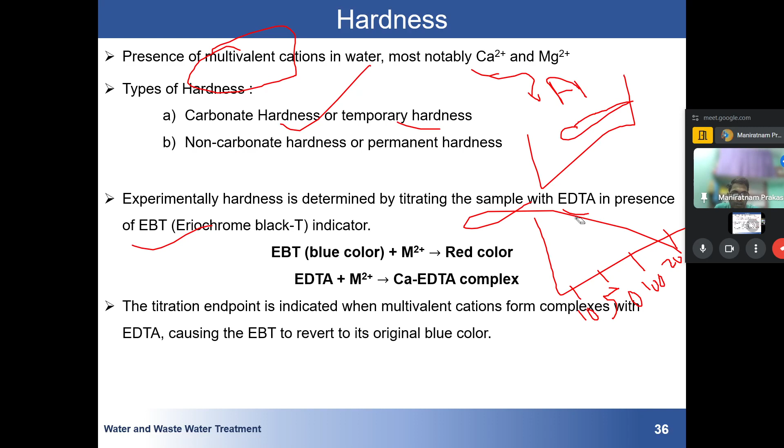And on the x-axis, we will be plotting volume of EDTA consumed. It will form a straight line.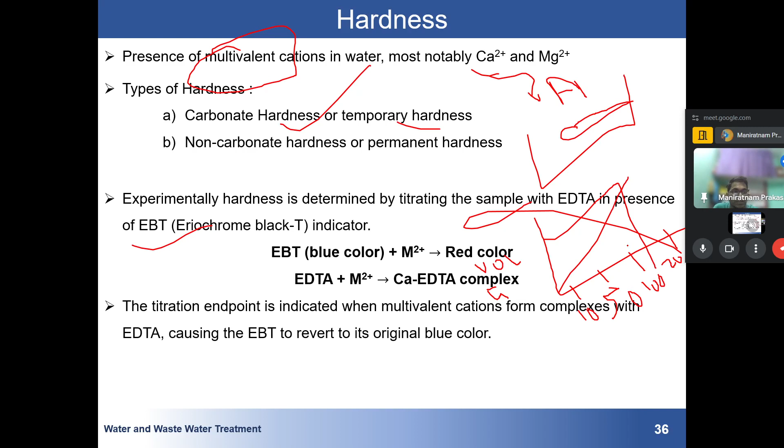For a known sample, we measure how much EDTA has been consumed, say X mL, and according to X, I will find my hardness, say 1050 milligram per liter as CaCO3. So the direct formula is: whatever multivalent cations are present in your system, you add them up, and you can find the total hardness.

Now, what is carbonate hardness? Hardness can be due to carbonate as well as non-carbonate sources. We know that alkalinity is due to carbonate present in the system; phosphate might be present but it is negligible. Alkalinity will be almost entirely due to hardness, and total hardness is the summation of carbonate and non-carbonate hardness.

So we define carbonate hardness as the minimum of total alkalinity and total hardness. Suppose your total hardness is 100, assumed to be carbonate plus non-carbonate, but alkalinity is only 50, and we know alkalinity is due to carbonate only. So the minimum of these two gives the carbonate hardness. The non-carbonate hardness is total hardness minus carbonate hardness.

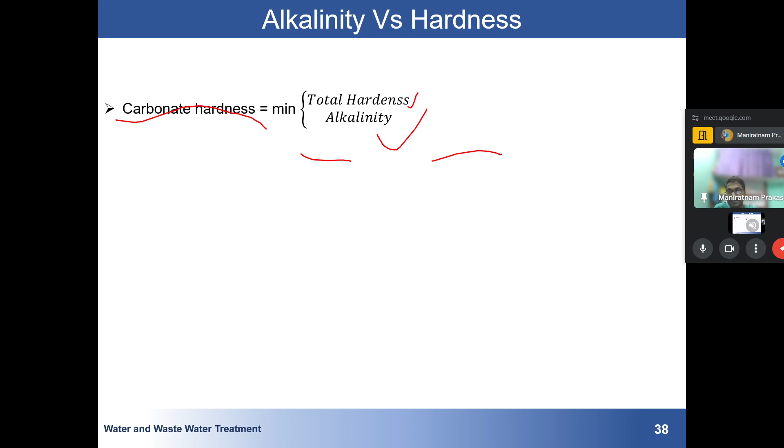A very simple question: a water sample's environmental analysis was done to determine its ion composition, yielding results for pH, TDS, calcium, chloride, magnesium, carbonate, and so on. Calculate the alkalinity, total hardness, carbonate hardness, and non-carbonate hardness in milligram per liter CaCO3. Additionally, assess whether the water is suitable for drinking.

For this portion, you can use the formulas I have given you, and for answering the last question about drinking suitability, you have to check with the IS code.

So the first thing you have to find is that alkalinity will be only due to this and this, and your hardness will be only due to this and this.

First thing you have to remember, this is a kind of gate question. This kind of question is being asked in GATE. You can check previous year GATE questions, and not only GATE, in normal exams of IIT Kanpur also, for environmental students these questions are being asked.

So the alkalinity will be the summation of this thing: milligram of OH minus divided by equivalent weight of OH minus, into equivalent weight of CaCO3, into for other systems also. The equivalent of CaCO3 is 100 by 2, that is 50 gram. The equivalent of carbonate is 60 by 2, that is 30 gram, and equivalent weight of bicarbonate is 61 by 1. Similarly for OH minus, it will be 17, 16 plus 1, that is 17.

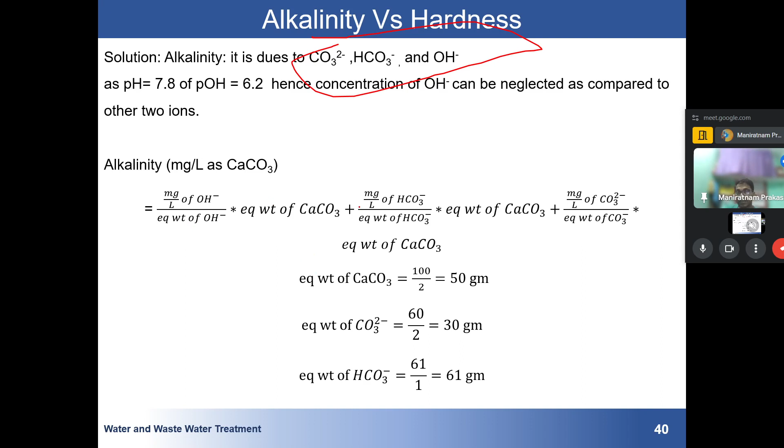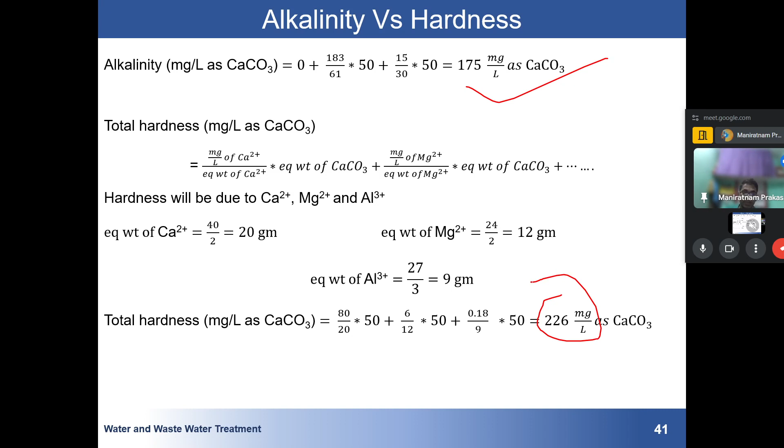So alkalinity comes out to be 175 milligram per liter. The total hardness is again due to only calcium and magnesium, but here aluminum is also present. So the equivalent of calcium is this thing, aluminum is this thing, magnesium is this thing. So I can calculate it and it comes out to be 226 milligram per liter as CaCO3. So carbonate hardness, we know that it's the minimum of alkalinity and total hardness. So again we know that alkalinity will be due to carbonate only, so carbonate hardness will be given as 175 milligram per liter, and non-carbonate hardness will be given by 226 minus 175, that is 51 milligram per liter as CaCO3.

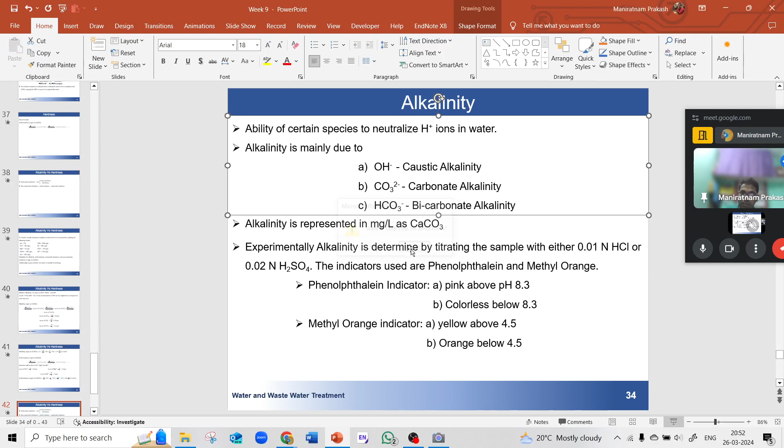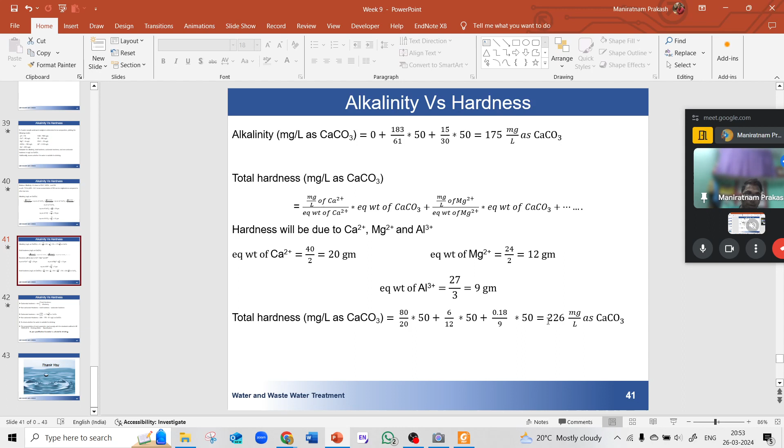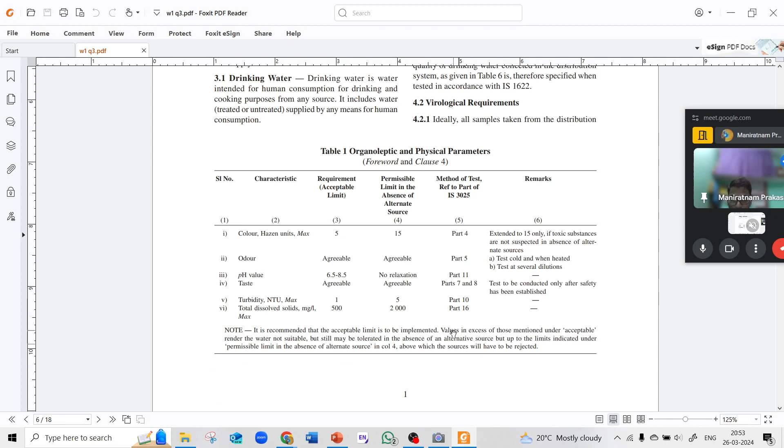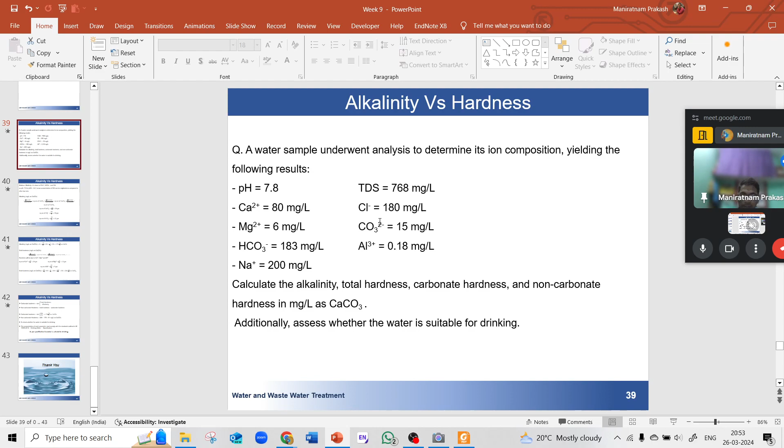Second thing is TDS, total dissolved solid. Its permissible limit is 2000, but again it is within the permissible limit. Then comes calcium and chloride. Calcium, how much calcium should be there? Calcium should be 200 milligram per liter, again it is within permissible limit. Again, chloride, it should be 1000, again it is within the permissible limit.

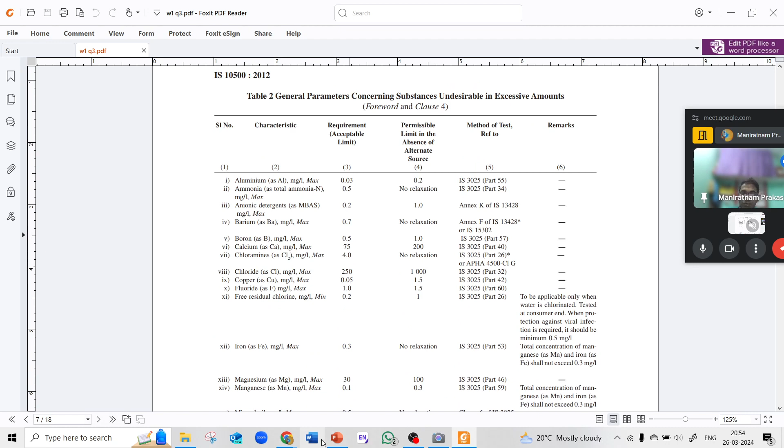Then comes magnesium. It should be 100, again it is within the permissible limit. Then comes aluminum, permissible limit is 0.2 milligram per liter. So again, based on the calculation, I can say that my water is suitable for drinking purpose.

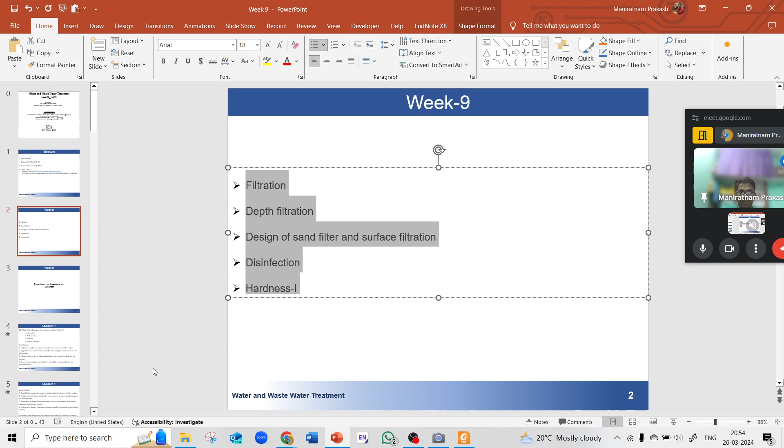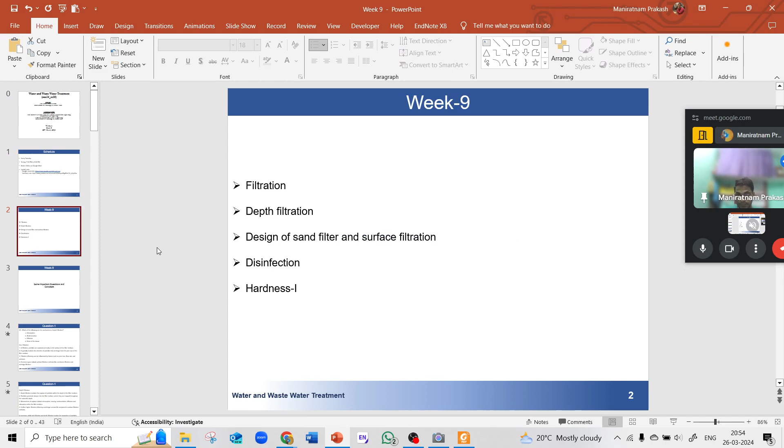So based on this discussion, I can say that my water is suitable for drinking purpose. So all of this was for week 9. So in the next week we will meet, and I will be discussing, for week 10, more about hardness and all.